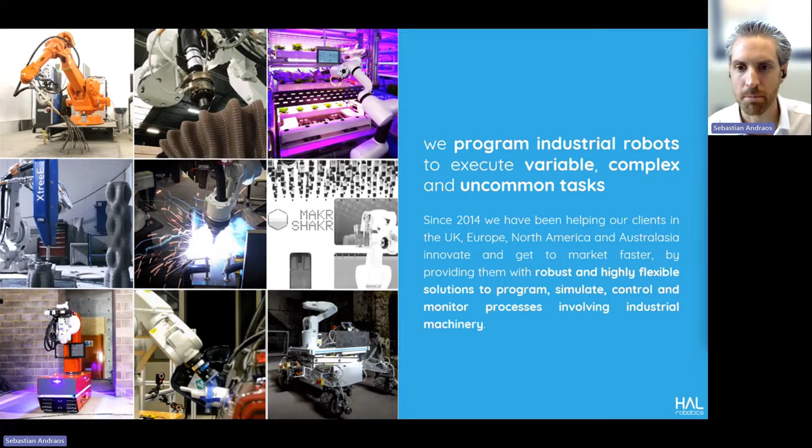We initially started off trying to make construction more adaptable and more automatable. But over these last 10 years, we've actually learned an awful lot more about manufacturing, starting with the fact that it's considerably less automated than most people are led to believe, with robots only really being used for the most repetitive tasks. Reality is, however, that very little of manufacturing is truly repeatable.

Contract manufacturers and most SMEs are changing the parts they're producing based on client requirements. And even in automotive-like mass production, jobs such as finishing paintwork are still handled manually because the locations of blemishes are different on every single vehicle. Whilst robots can be reprogrammed between runs, the financial and time cost of that reprogramming is often prohibitive.

More importantly, robots tend not to be deployed because these tasks require tacit knowledge from an expert operator who probably isn't the same person who can reprogram the robot. Add to both those facts the labor and skills shortages that seem to be ubiquitous across the industry, and the need for an easy-to-use, adaptable solution becomes increasingly clear.

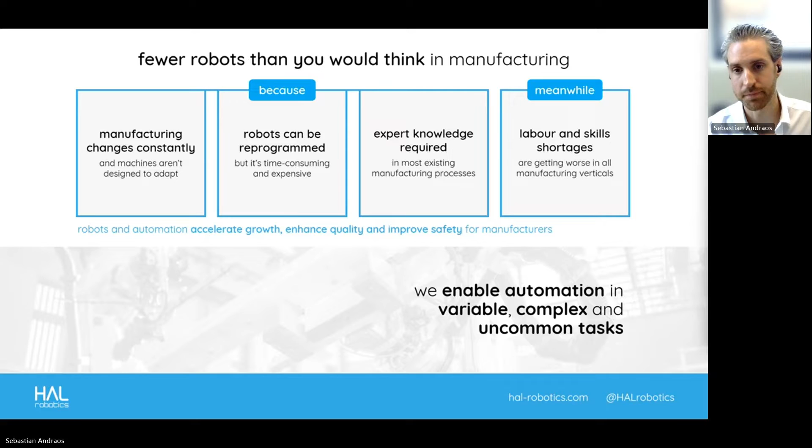We've taken a kind of three-step approach to simplifying the uptake of robots and automation. Firstly, we think that by combining the strengths of operators and machines, we can create a team that's better than the sum of its parts. That, in turn, allows automation to be used in more places and processes. Collaboration which actually empowers operators to be much more productive and supports manufacturers' growth. And then that reconfigurability leads to flexibility and batches of one being produced with economies of scale.

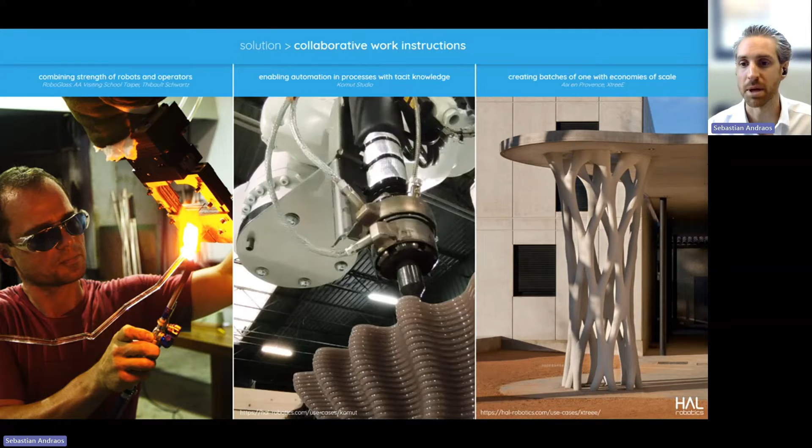Everything we do is underpinned by our end-to-end robotic middleware, the HAL Robotics Framework. It uses generative robot toolpaths derived from data sources like 3D scans, CAD models, or text in a database. And that means that any time incoming data changes, so too does the robot's program. That gets validated almost instantly by the cell's digital twin to ensure any potential errors are caught before runtime.

The framework is completely vendor agnostic, supporting robots from ABB, Universal Robots, KUKA, Fanuc, Mitsubishi, and nearly a dozen others. It also exports code in the robot's native language to maintain any integrated safety and system functions.

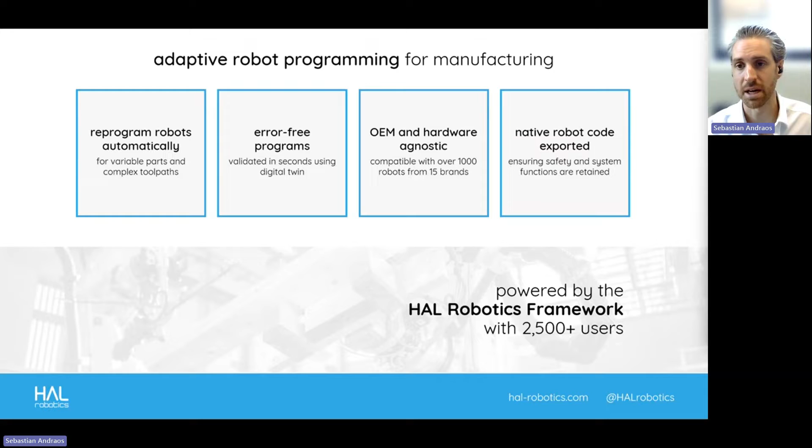And that's really the basis of our new software, Decode. It's an operator-first software, which can be adapted for just about any process, from finishing to additive to inspection and quality assurance to welding. It's designed to give the operator, the person with the knowledge and experience, enough agency to adapt a process without burdening them with the complexities of robots.

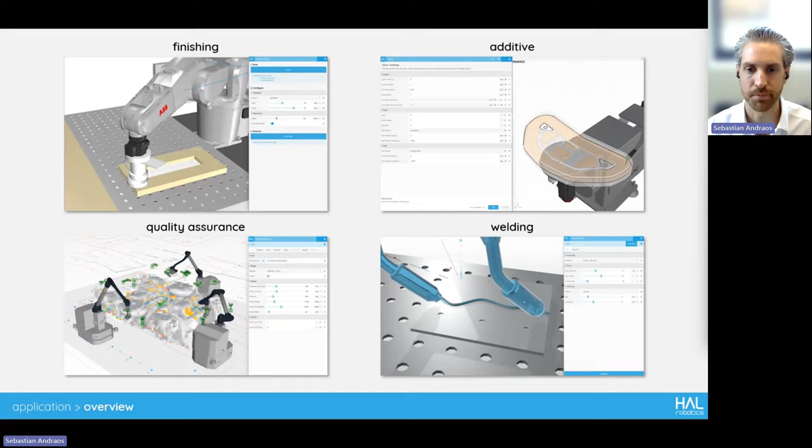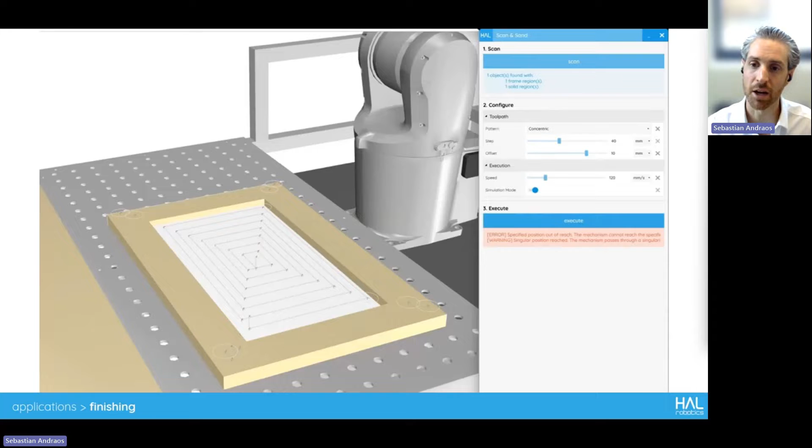For example, in this finishing application, the operator is presented with a straightforward list of instructions and options to run the cell themselves and adapt its performance. They can change the pattern of the finishing pass, its spacing, the robot speed, and a few other essential tacitly known pieces of information. When they hit go, we run a very fast simulation to check for any potential issues and alert the operator that in this instance, the part can't be reached.

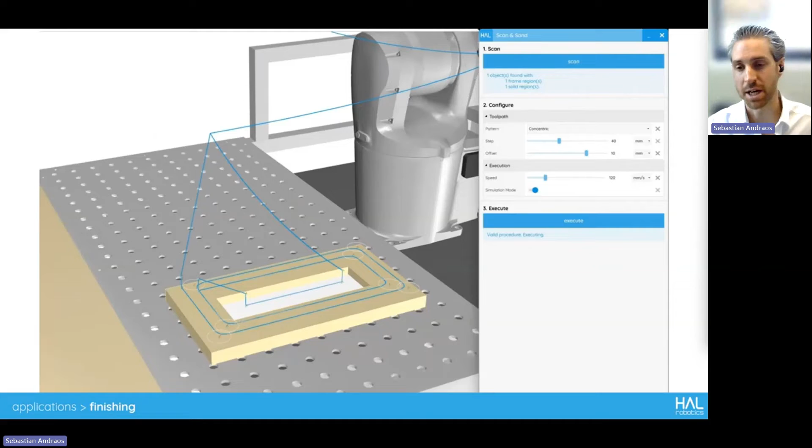As soon as the incoming data changes, though, to a part that can be done, the same toolpath generation strategy is applied to the new geometry, the checks are done, pass, and the robot's sent on its way. In the real world, on our testbed here at the office, just a few tweaks to the speed and pattern, and the robot is off.

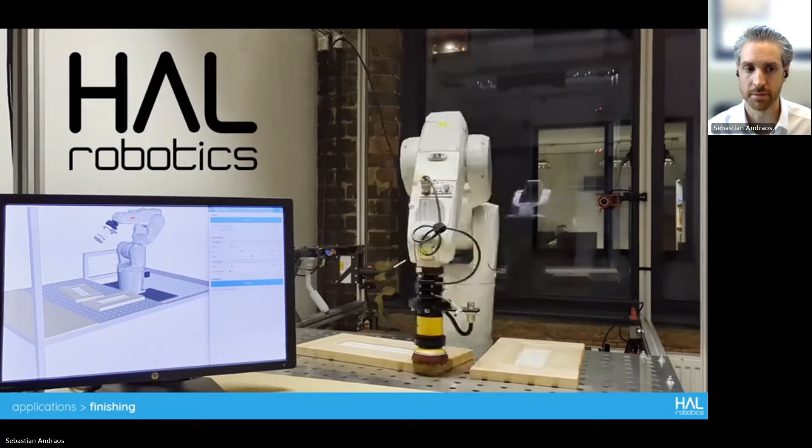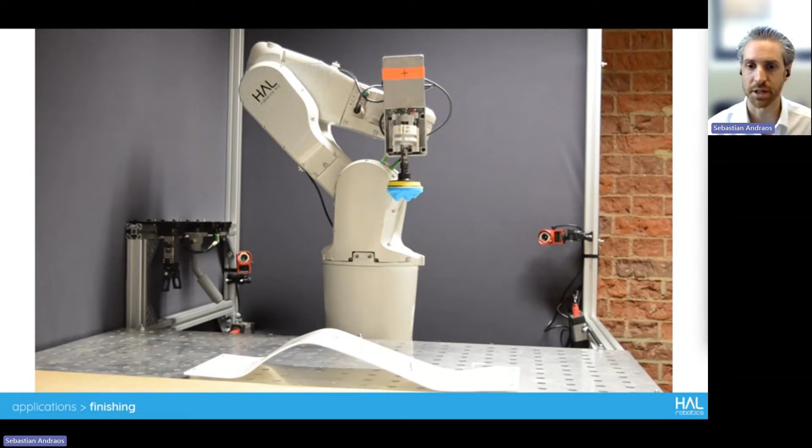And because few parts are as flat as those cabinets, here we can see an operator identifying regions that need work on a doubly curved part, the operator's skill at identifying defects collaborating with the robot's precision and tirelessness to execute the job.

In this instance, the operator is encircling the region that needs rework with a marker, and a 3D scanner is identifying the part's geometry and that region of interest. Those are then being used as the data input for the rest of the software.

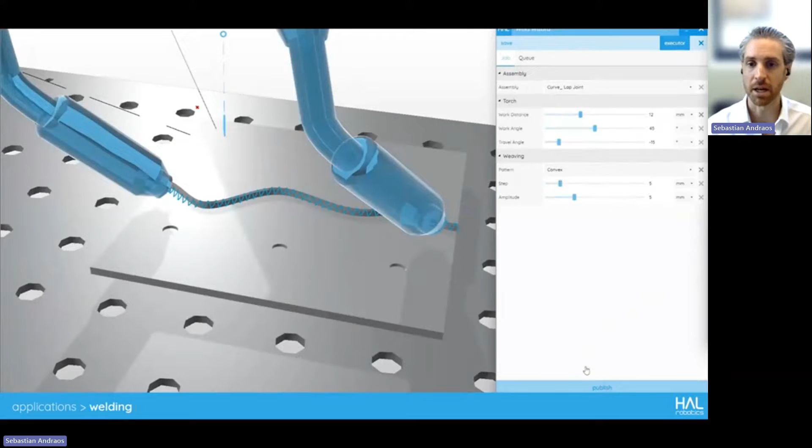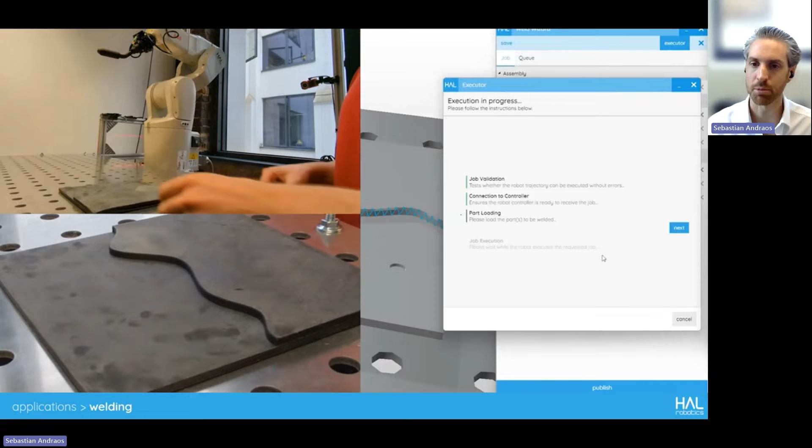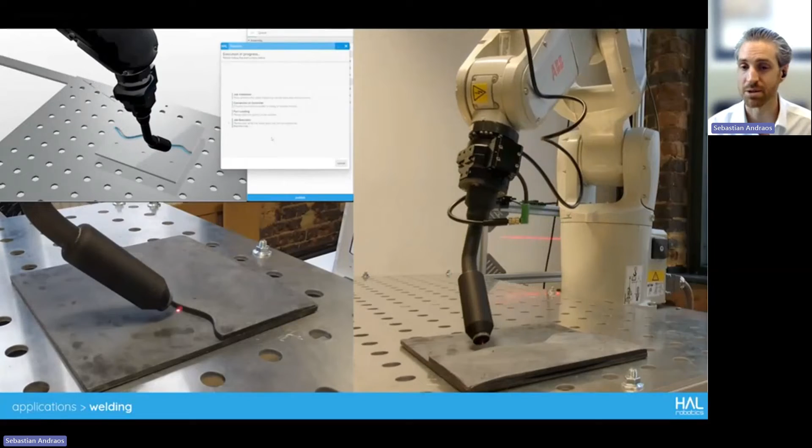In the case of something like a welding application, the operator's options might be a little bit different, choosing work distance and torch angles rather than the forces and speeds. But the principles remain exactly the same, allowing the process expert and robot to use their skills where they are most needed and valuable, and guiding the operator through their work, whilst of course giving that operator the options they require to adapt the process if any adaptations are needed.

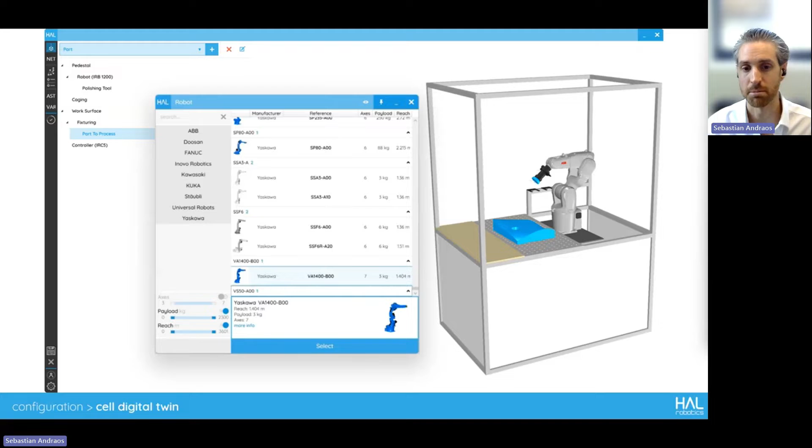So, how do we configure all that for the operator? It's in 4 main stages. We start with the cell's digital twin, adding in the robot, tool, controller, environments, CAD models, signals, and everything else that enables a good simulation of the equipment. We provide catalogs of robots, controllers, and some tools, but also give our users the opportunity to build and model in anything that isn't provided out of the box.

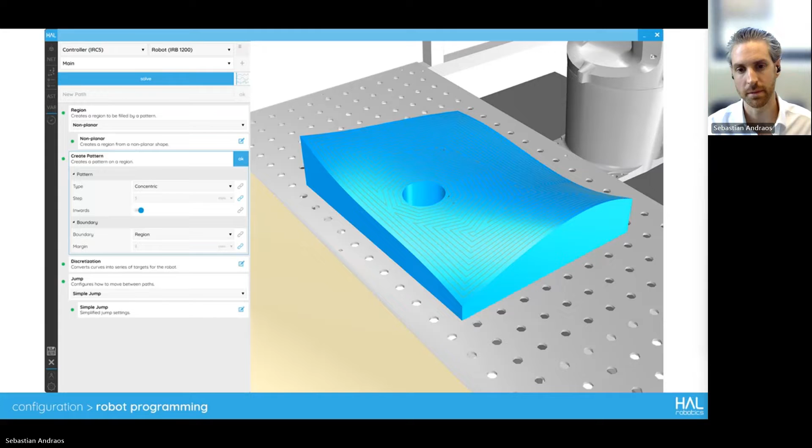With the robotics side set up, we move on to describing the process, adding instructions for the operator, triggering external devices, starting the robot, whatever that process needs. It's worth adding probably at this point that the whole software has been designed to be easily extended. So if there are any special steps needed here, they can be added. For example, reading something from an ERP system, writing a log to a database, or even gathering data from some external sensor, as we saw in the polishing demo a moment ago.

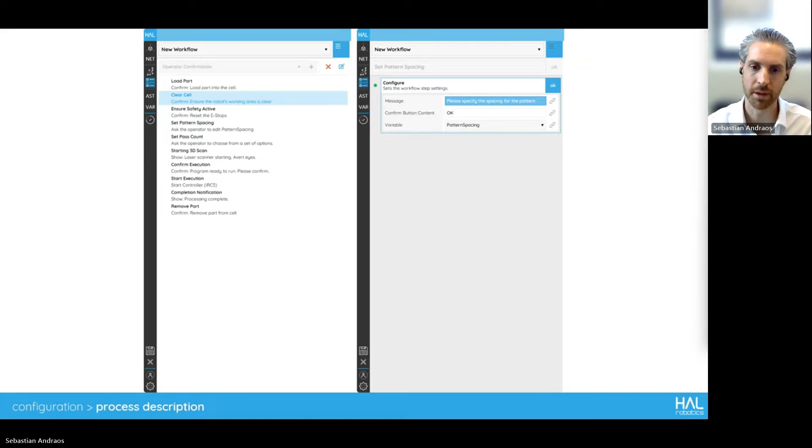That's all it takes to get us to our first test of the operator's flow. From here, we can run through, ensure that we're happy with the options and instructions presented, run simulation with any variable changes, and then start sending code to the robot. I'm going to switch over to HAL decode itself, and we can take a look at how it all works.

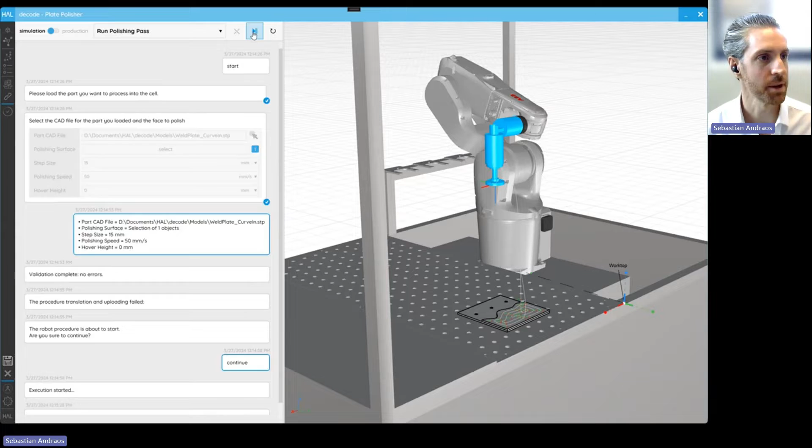So this is decode. It's already been set up with a session in it, and I think it's probably best to start from the end. This is the operator's workflow, and if we hit run, this is what the operator is expected to interact with as they're using decode. So they receive instructions, for example, in this case, to load the part they want to process into the cell.

And then they can be given options, things we want them to be able to change. All of these are assignable by the integrator. We don't offer all the options necessarily. These are really a selection of options that we want them to be able to edit. So for example, the step size, we can change down to 10 millimeters, and we can see the pattern that the robot's going to execute.

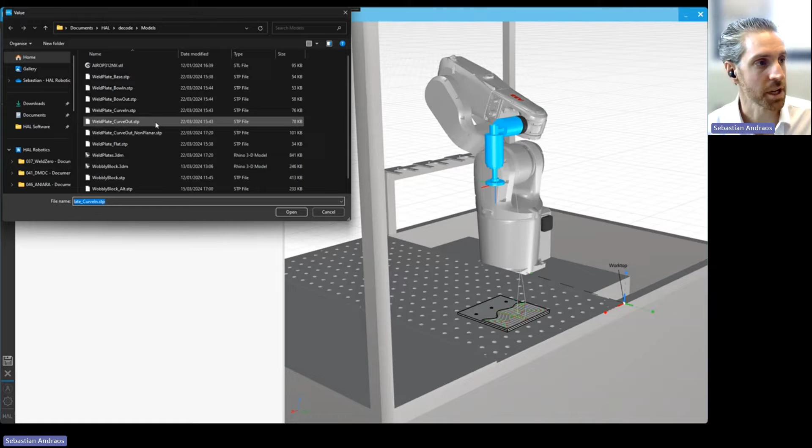Updating that. We can also ask them to load in a new CAD file, like this different geometry, ask them which surface we want to deal with. Select top, hit OK, and the toolpath's regenerated based on that input data. We can then obviously rechange our step size if we want to, change the speeds, the hover height, which is just an offset from that.

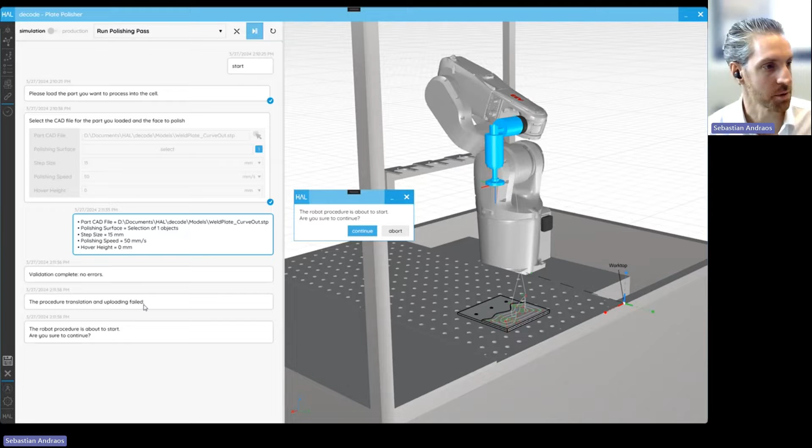And then when we're happy with our settings, they've already been validated automatically. We check the validation again just to be really safe. Because we're not connected to a real robot, we can't upload. We get a warning that the robot's about to start. We accept that warning, and the robot, in this case a simulated robot, goes off and does its thing.

If we switch ourselves from simulation to production mode, then all of those instructions that are going to our virtual robot go to the real robot instead. We can see our robot following through our toolpath with the parameters that we've just set up for it.

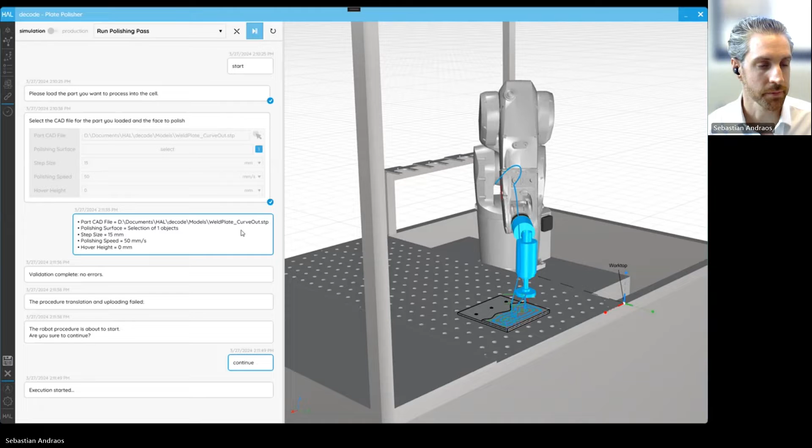There we go. So if I now backtrack to see how this has been built up and how it's been set. We said we start with the digital twin, the scene. We have our robot tool attached. Both of these are kind of standard from our catalog. We then have a kind of sequence of references and parts.

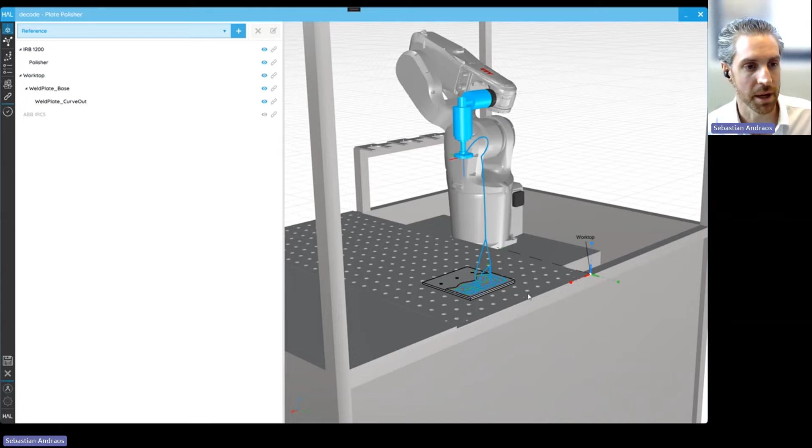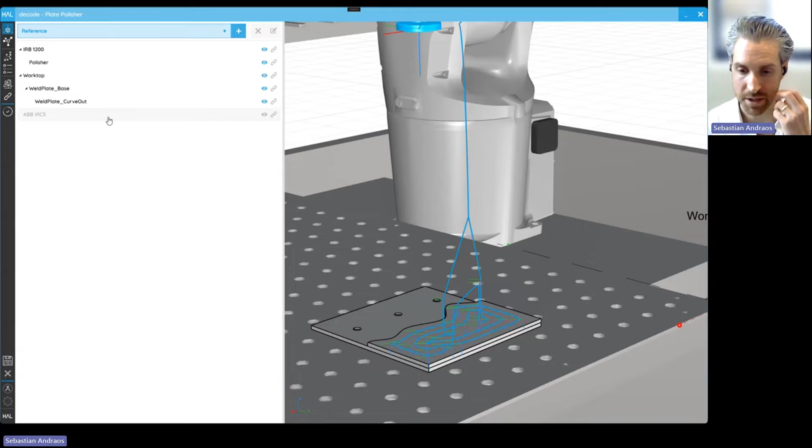You can see here we have the main reference, which is our worktop, onto which we have the base plate that the part's been placed, and then the part itself. Each of these with a relative offset between them, so we're not having to work in weird coordinate systems. Everything is relative. And then we, of course, add in the robot controller, which can be configured to match the options and configured to talk to the real controller at the same time.

We then have all of our signals. In this case, we have only added a single signal to trigger the tool's activation, which has both a user-readable name and an export override name. So we can use it as being called tool activation, but when it gets to the robot, it's called DO01. Again, trying to keep things as intuitive and legible as we possibly can.

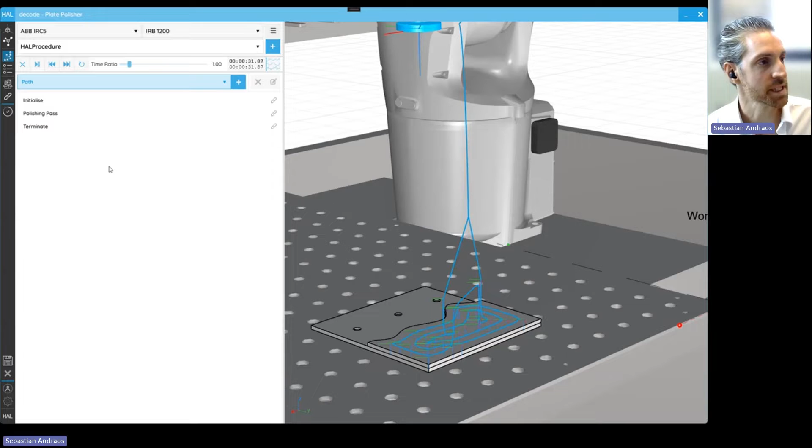Then within the toolpath, there are several things going on. The most interesting of which is probably this polishing pass itself, where we're generating the pattern based on the region that we've selected. There are settings for the pattern. We can make it concentric or parallel lines. We can, again, change some of these settings. This is where we link them to variables for the operator to be able to change them later.

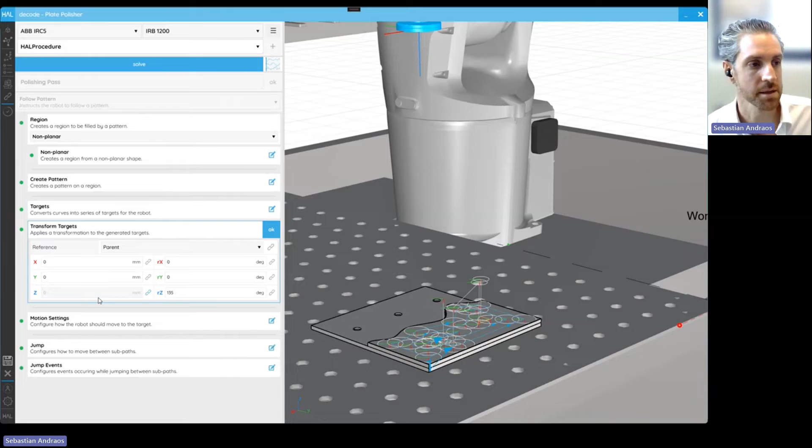We can adapt the targets, ensure that they're always normal to the surface, which is obviously trivial on a planar surface. As you saw in the plastic polishing earlier, we can also handle that curvature in 3D. We can apply transformations, so offsets of those targets, automatic rotations of those targets.

Configure the motion settings, change what space we're moving in, speeds, the blends. In this case, the blend is linked back to the step size. So the spacing between each of these passes is the same as the blend. Keep the toolpath nice and smooth. And we can change how we jump between different sections of this, what the retraction distance is, what the retraction and approach speeds are, how we move between those spaces, and also what happens along that toolpath.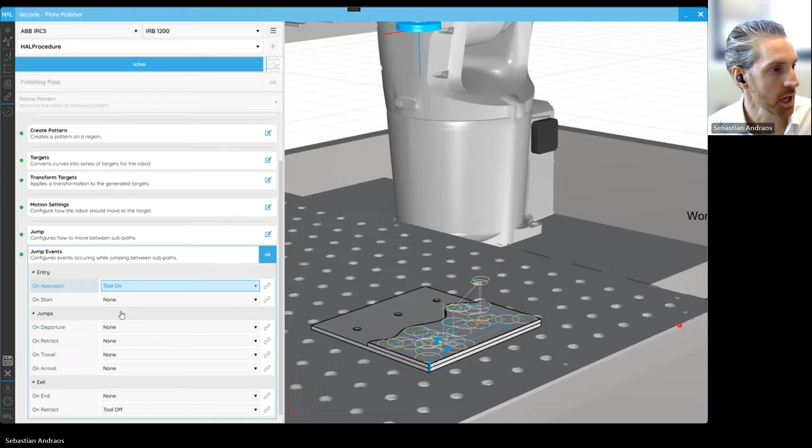So as we approach the beginning of any path, we trigger the tool to turn on. We don't, in this case, do anything at the beginning or end of each path. The tool can stay on throughout the process. And at the end, we turn it off. If we wanted to activate the tool just as we contact the material, if we were doing something like a welding application, then this is where we'd add those tool on into the jumps settings that are there.

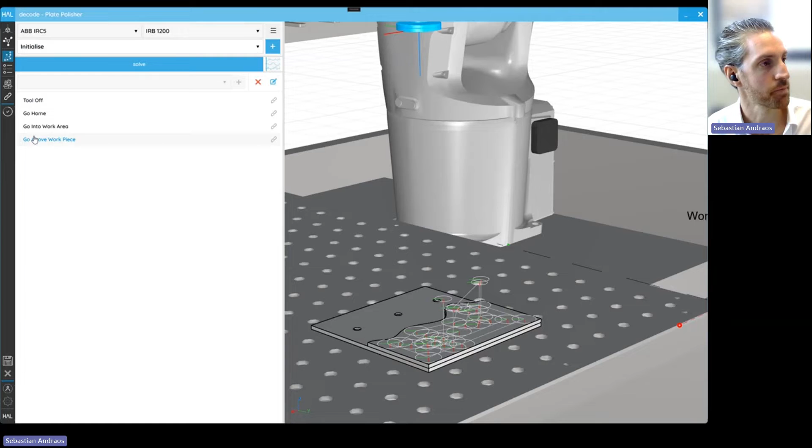This is also structured to be made out of sub-procedures. So initialize and terminate are sub-procedure calls that we can go and dig into. So initialize, for example, contains the sub-procedure tool off, and then a few motions to move it into the working area above the workpiece, and then the path takes over from there.

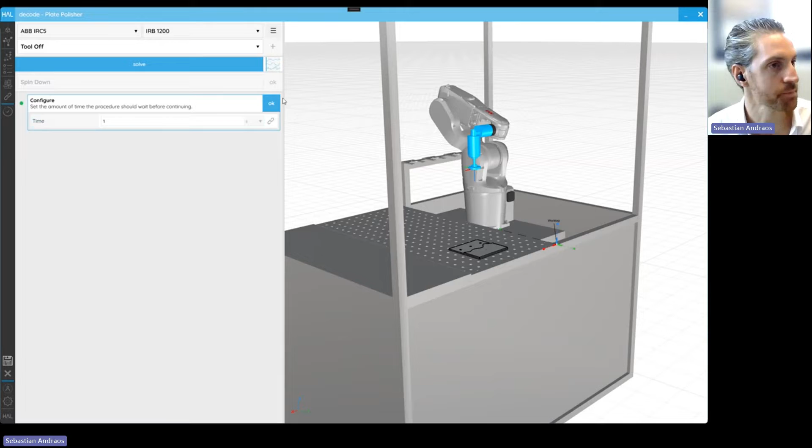And if we take a look at what tool off contains, we have a signal action setting the state of the signal to be off in this case, and a wait instruction so that we give ourselves a second for the tool to spin down, because it's a rotary tool. There's a bit of inertia that we need to wait for before it's truly off. Within then the workflow.

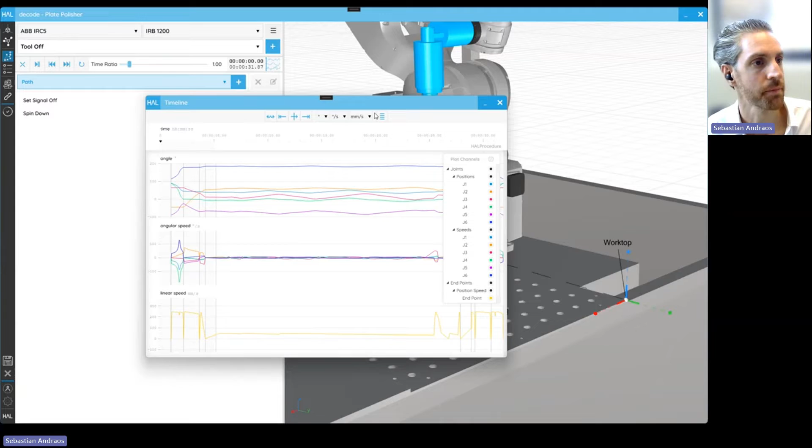And then we can obviously solve and validate the toolpath and dig into the details if we need to through the procedure timeline. If there are any errors, which of course there aren't because this is a demo, we can highlight them within here, and we can also scrub through the timeline if we need to work out why an error is occurring at this particular location, for example.

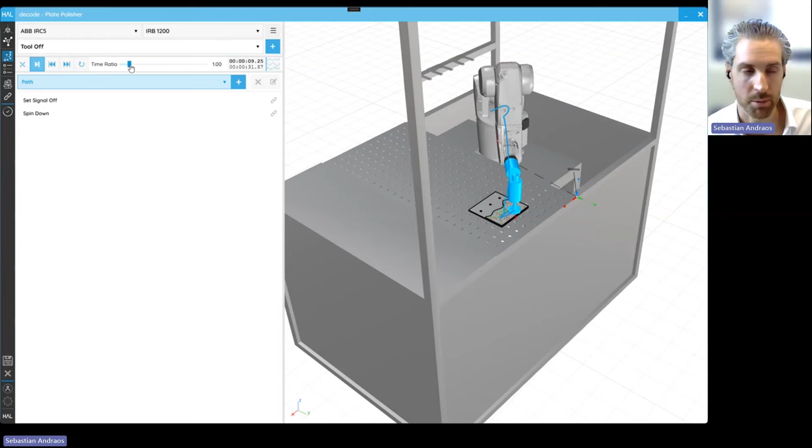Or we can reset and run through the procedure as a simulation, skip forwards and backwards in actions, and particularly for finishing processes or long-running processes, we can also accelerate time, which is extremely useful. With the procedure then in place, as you mentioned, we can head into the operator's workflow. This is where we set up what the operator is going to have to interact with, essentially.

So we can notify the operator, just give them a message that requires no interaction on their part. We can ask them to confirm some sort of information, as we saw loading the part. Ask them to change a value, ask for their input, basically. Give them choices. So which type of part have you just loaded? Part type A, part type B.

And within each of those, we get branches. So we can run subroutines, essentially, or sub-workflows based on the choices that that operator has made, based on which part has been made. We might ask them what material the part they've loaded is made of. And in the case of steel, we might need to go slower or apply more force than in the case of an aluminium example. So we can create these forking choices so the operator doesn't need to keep all that knowledge in their heads.

We can also change how that works based on pre-designated information and choices that they can make. We then have things like export code. So this is where we generate the code for the robot itself. Groups to keep things nice and organized. Setting the procedure execution, so actually running the robot, simulated or real. Setting variables without the user's input. So like I was saying, in terms of those choices, uploading code to the robot, and validating the toolpath.

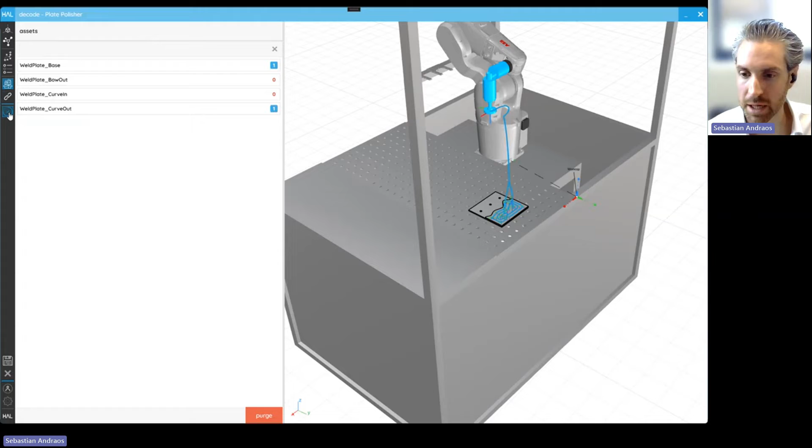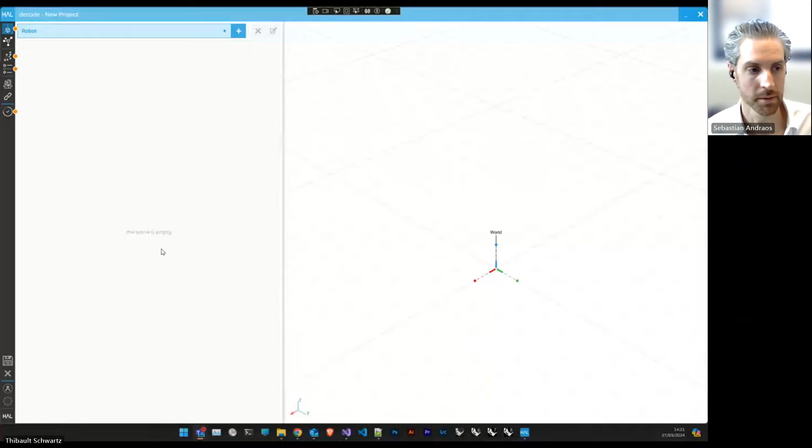I can't see any questions at the moment. So I will hand over to Thibault to go into some real nerdy goodness with our SDK sitting behind the scenes. Thibault. All right, can you hear me?

Oh, good. So I will just add a few things to what Seb has just showed you, starting this time from a completely blank document. So I just started a new project, and you can see that the different parts of the software are always asking you if something is incomplete or if you have an error locally. So you are always guided through the definition of your project, and you don't have to look forever for where there might be an issue. You know where to navigate immediately and fix that.

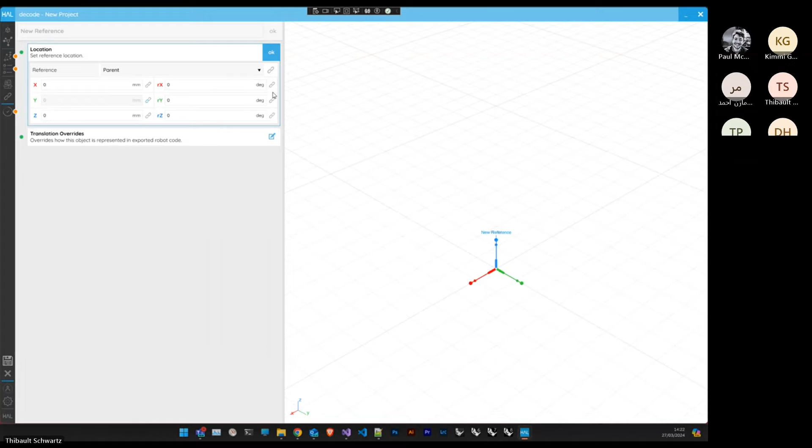Another thing which is quite interesting is these little links here making variables. So here, for example, I have my y reference coordinate bound to a new variable. These variables can be manipulated manually, but they can also be linked both as inputs and outputs to Grasshopper.

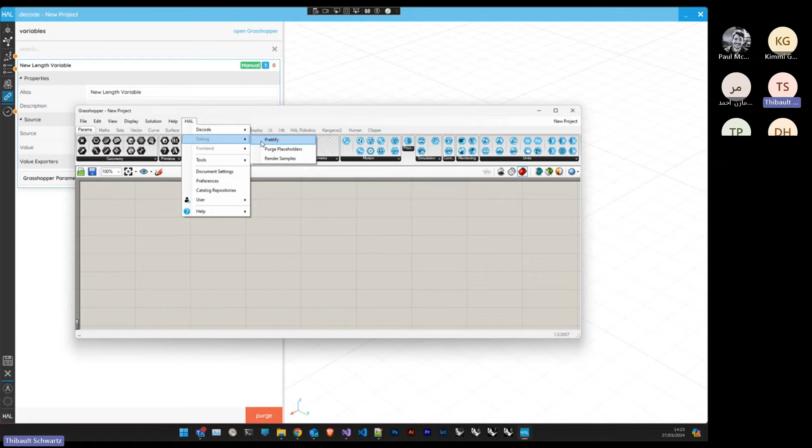So decode runs on top of Rhino, which means that we are compatible with 50 plus CAD file extensions, so we can import pretty much anything on the market. And it also means that we have access to all Rhino plugins and all Grasshopper plugins that you have installed on your machine. If you open Grasshopper from decode, you have access to everything you've installed. And it is possible to drive decode from Grasshopper. So here, for example, I have my reference linked to my y coordinate variable.

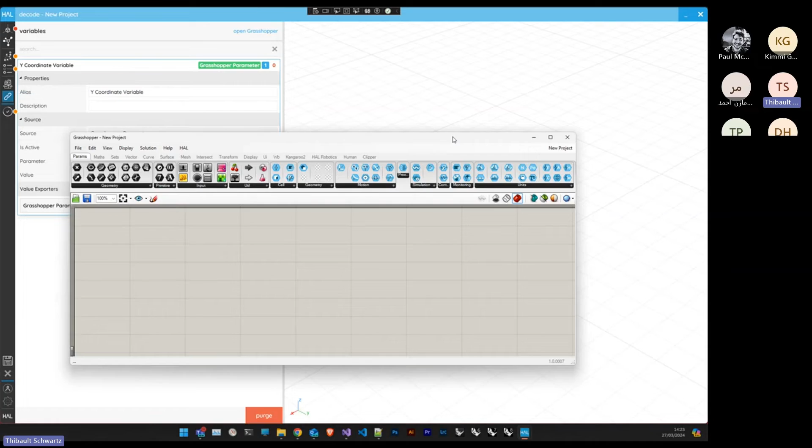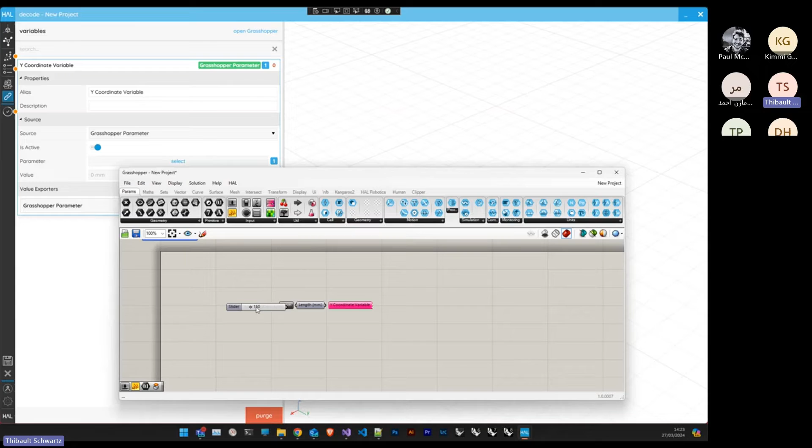And maybe what I want to do is to specify this coordinate in Grasshopper. So what I can do is place a new length unit parameter from HAL directly in Grasshopper and select my Grasshopper parameter. Now, if I change value in Grasshopper, then I will be changing my reference in decode. So that's the basic principle.

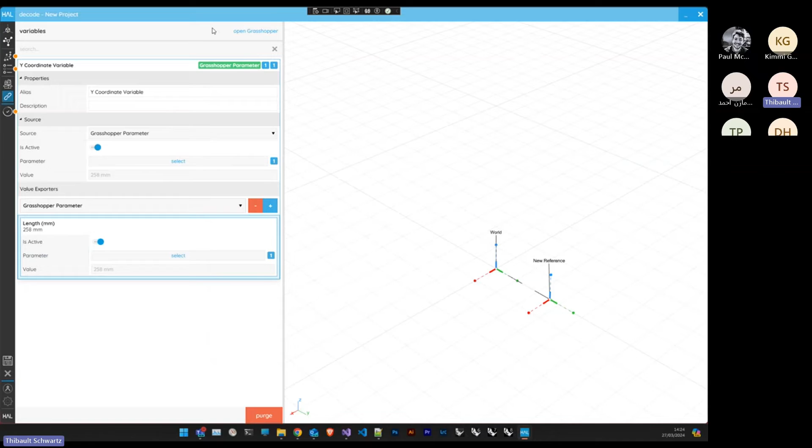And then we can go much beyond this very basic logic. We can also export back existing values from decode to Grasshopper? So here, let's say I want to export this variable again back into Grasshopper. Now, as you can see, I am importing Grasshopper value into decode from Grasshopper, and then I'm exporting from decode value back into Grasshopper.

So you can have an exchange of data between things that you program in Grasshopper, or if you are an existing HAL SDK user, you might already have definitions, custom tools, toolpath strategies that you already developed over the years. You can use decode and your existing files, or use Grasshopper to extend the features of decode pretty much anywhere in the software.

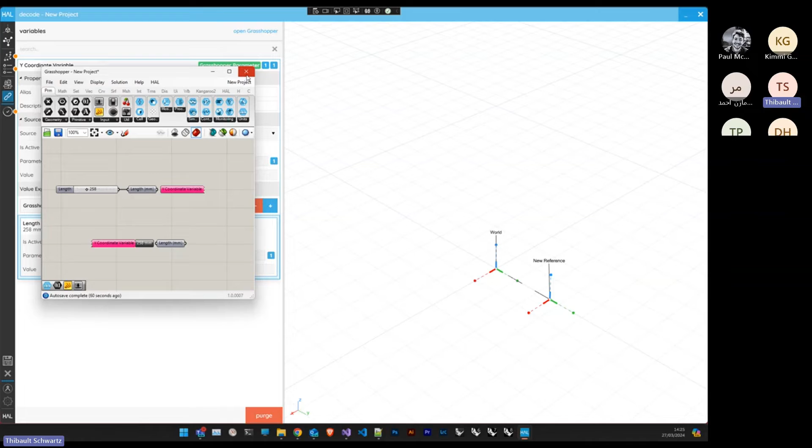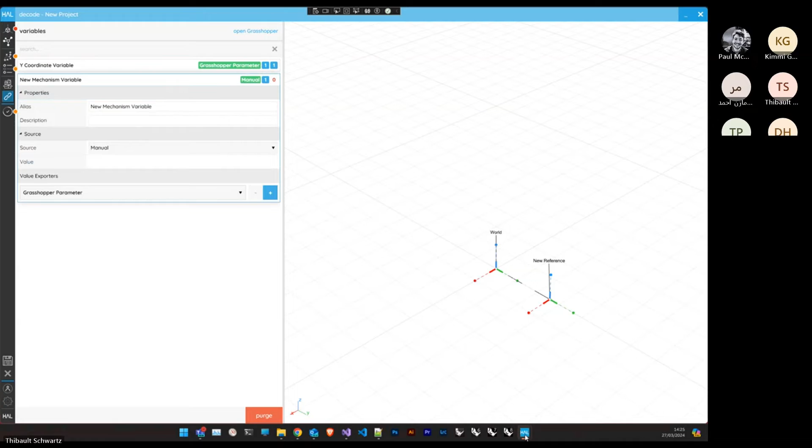Because now, if I come back in the scene, for example, and I want to add a new robot, what I can also do is say, I don't have a robot. I just want to get a robot from a variable. And then if I simply say, this is a robot from Grasshopper, I can go back to Grasshopper and select a robot, or use an existing robot I already have.

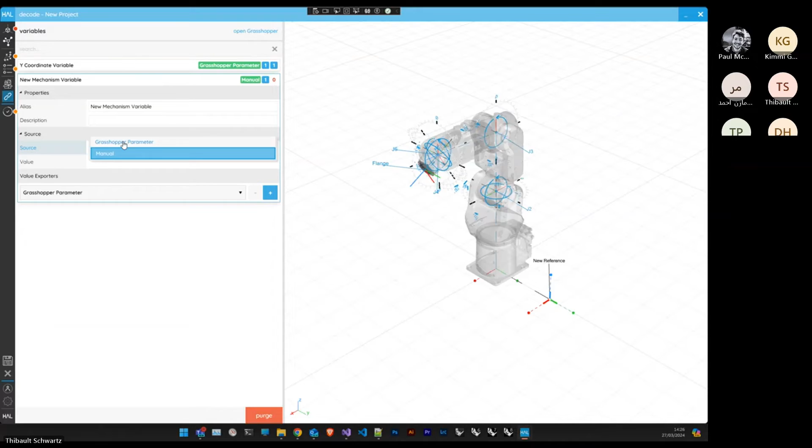And like that, I can just pick my robot in Grasshopper, and it is now in decode, and I can attach a tool or use it in decode. So the integration between Grasshopper, Rhino, and decode is absolutely seamless. You benefit immediately from using decode from hundreds, if not thousands, of plugins and existing code files available from the McNeel community.

I'll give the mic back to Seth now.

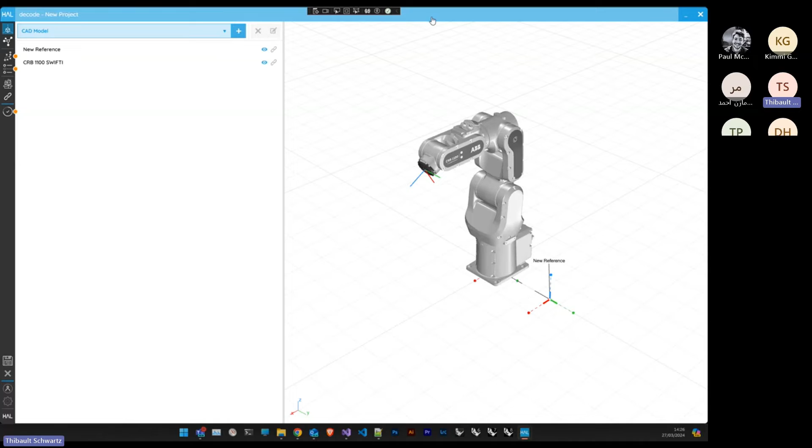Cool. Thank you, Thibault. So for those of you unaware a little bit of the history of our software, we have had Grasshopper as a visual scripting platform built into McNeel's Rhino 3D, which is very useful for generating geometry and doing kind of parametric modeling and generative design work. And we have long had an SDK that's built into Grasshopper as a means of parametrically programming robots from that visual scripting interface.

And so for any existing users who want to use their existing Grasshopper knowledge to extend the functionality of decode, if there are features that aren't there, then that's absolutely possible. And you can use decode as a means to simplify the user interface.

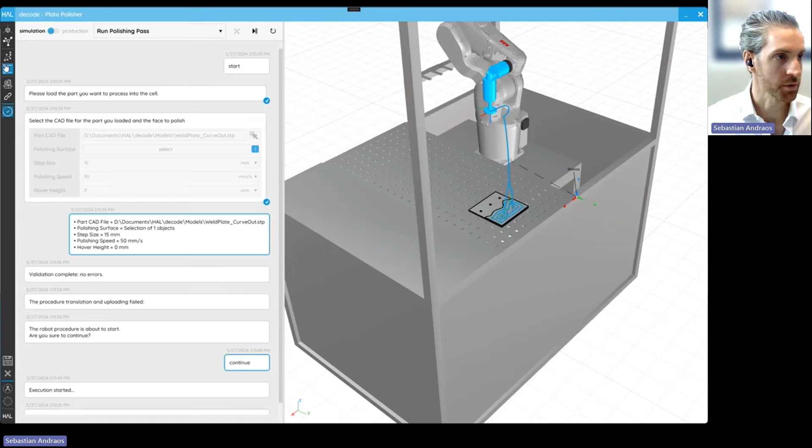So the extension isn't installed on this PC currently, but as well as having here, for example, upload code or set procedure execution that talks to a robot's controller, by adding the vision extension, we can also say request 3D scan from, in this case, we were using a MechMind device. So request scan from the MechMind device, it will ask you in the configuration to set the IP address, the resolution, the shutter speed, the number of passes, things like that, that we need to be able to parameterize that configuration.

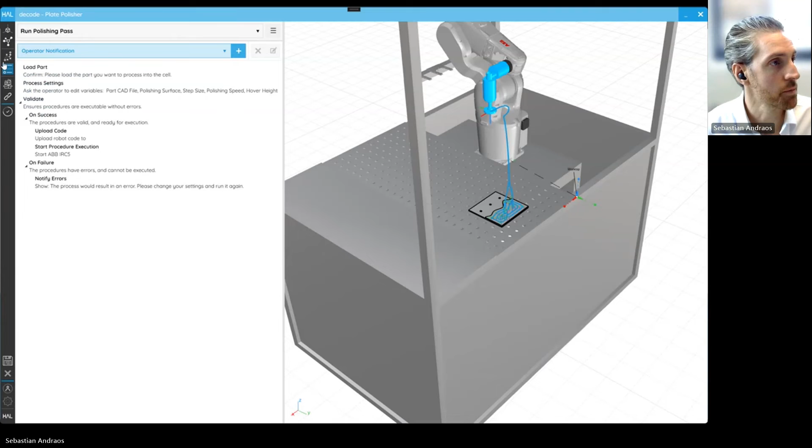And so within this workflow step, we can communicate to the other devices that are associated with the scene. And then, as Thibault has shown already, the variables can be set from external sources. So in this case, he was showing you the Grasshopper parameters, but those sources can also be a file. In the case of a point cloud, for example, if we're saving a point cloud to a file or receiving a point cloud back in, we can assign those values back to a variable, which, as we saw in this case, then get processed again all the way through the chain, and we generate toolpath based on that.

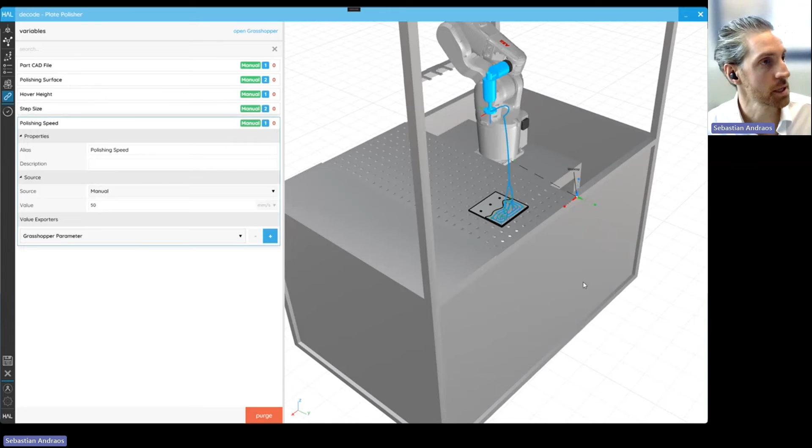The way that works in practice means that things are extremely flexible. So we are a robotic software company. We're not a vision company or a vision software company. We know there are people who do that better than we do out there. And so what we can do is actually call out from within Decode to their software to do some of that vision processing for us and get just the regions, for example, back.

So in the case of that doubly curved polishing example, we built that bit of vision software ourselves. But if there was a GOM system that was looking for deviations between nominal CAD parts and scan data, and we only had to go and polish the bits that were outside of tolerance, then we could get that data back from the GOM system and say this region and this region are out of tolerance, and use those as the input regions for the polishing. So it's super flexible, and it comes in those extensions to the software.

That is the long answer to that. I hope that answered your question.

Can Decode integrate with two robotic arms with different tools and a positioner in the same file and same workflow? So the HAL Robotics Framework can handle multi-robot and positioners. These aren't things that we have in Decode at the moment. We're really hoping Decode stays as the kind of simple, easier to use side of things. Long term, it's definitely something we intend to have.